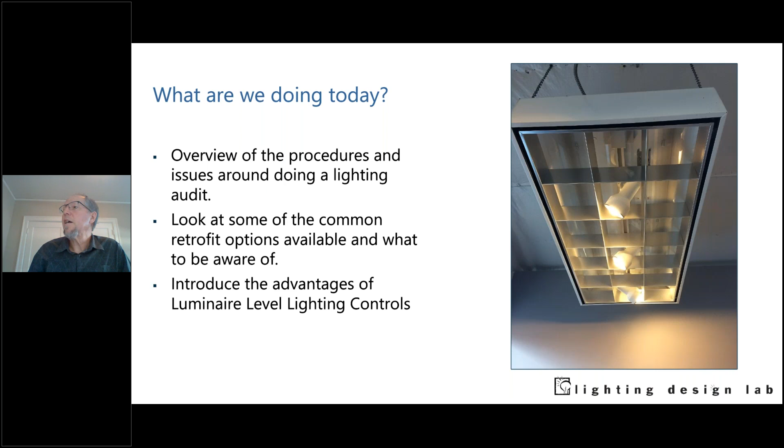In this case, this was a troffer type fixture that was sort of suspended, fluorescent, and the customer decided to convert it into a track fixture that's probably incandescent. So they went from maybe two 30-watt lamps to possibly three 75-watt lamps. They went from a general lighting fixture to something that's more focused, although in reality they were using focused lighting as general lighting. It's kind of crazy. Anyway, I love the picture. It's just nuts.

All right, so here's a little quiz to find out a little bit more about what our audience is and what you're interested in. Katie? Yep, so I have launched the poll. Eric, can you see the poll or just the screen that you have? I can't see it. Well, it's collecting responses. I'll close it in just a second, and then we should be able to see the result. Still voting. I'm gonna give it 10 more seconds. We're just trying to gauge what kind of knowledge you have, or what your hope is for this class. Okay, I'm gonna close it here and share it. Can you see the sharing, Eric? No. Oh man. Okay, so most of the people have done lots of audits and retrofits, but there's 38% that are new to the field and want to know about every aspect. Now, 8% thought this was a cooking class, so I'm really interested to see the survey at the end. All right. I'm going to hide this, and it'll go back to your screen. There you go. Thanks.

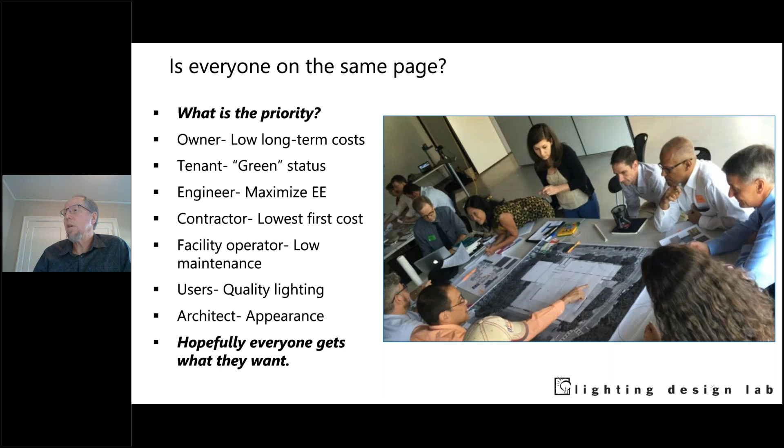All right, so you're called in. You always want to do a preliminary survey, and I found a lot of times that the thing we hear about is the hardest thing. The client calls and they're like, yeah, we've got this type of fixture or this type of space, how do we do a retrofit for this building? And you can spend a lot of time and effort on one or two trouble spots and not realize that the whole building is actually fairly easy, and you just have this one hard area.

This often leads to a discussion where I'll say, well, do you really need to retrofit the entire building? And sometimes they're like, yeah, we've been given direction that everything's got to be changed to LED. I worked on a project where that was going to be pretty simple for 95% of it, but they had some exterior lighting bollards where there was just going to be no decent retrofit. So they either had to put in new fixtures, which is kind of pricey, or not. And they were fairly new, probably put in within the last 10 years and functioning, but they were just metal halide. So that's a discussion you have to have: are we doing these, or can we just take a pass on those? And this is where sometimes a detailed audit is warranted, just to be sure you know what's happening.

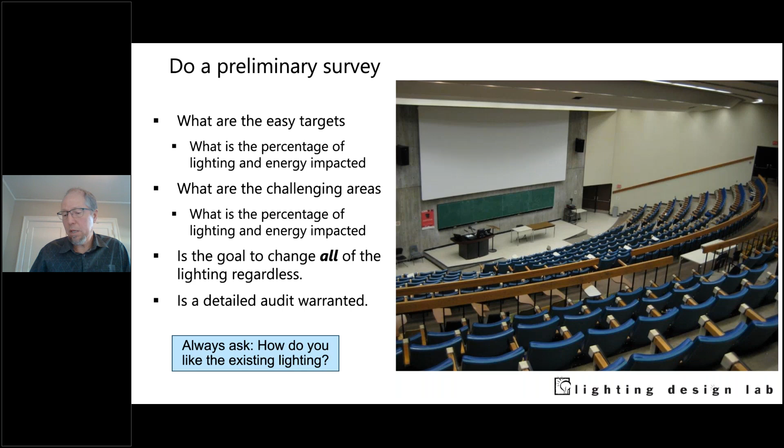You always want to come back to that question: how do you like the existing lighting? That term 'like' can have different shades of meaning. The lighting quality could be fine, it's just they're pulling their hair out trying to maintain it. Or it may be limping along, it's just bad lighting, nobody really likes it, it's not bright enough, or it's poor quality. So it's good to have that discussion with them.

So is this building a good candidate for a retrofit? That's a question. The client wants to do a retrofit, and you need to calibrate their expectations a bit on how much energy they'll save or how easy it's going to be.

Some clues you might look at for cost effectiveness is hours of operation. Is this a 24-hour facility, or is it 8 hours a day? Or sometimes it's a lot less than that.

We get calls from churches as a good example, where they have their sanctuary, and it's all incandescent, let's say, and it was put in 40, 50 years ago, and it's going to be a real challenge to retrofit it. It's using a lot of energy, but guess what? It's not really on very much - only maybe 2-3 times a week for a few hours at a time.

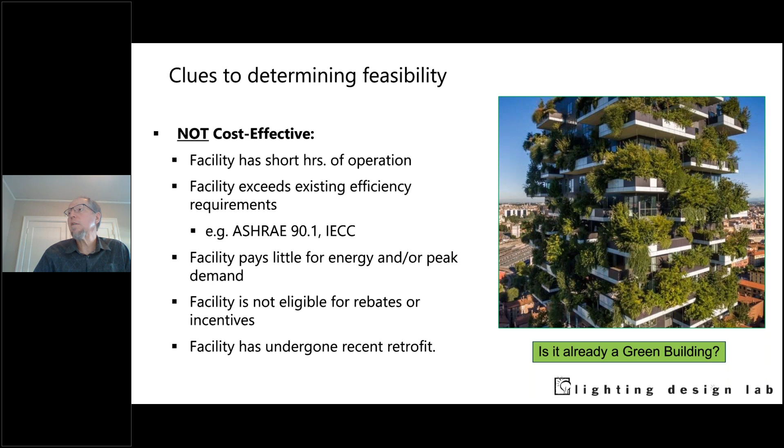Or a facility's undergone a recent retrofit. We've seen that where they want to switch to all LED, but the lighting is relatively new, and so there's not going to be as much savings as it would be for an older building with older lighting. I like this picture - maybe is it already a green building? Okay, so gotta find those things out.

So here's a little question, which is more likely to be cost effective? And we'll just talk through this one. I don't think we have a quiz for this one, but which is more likely to be cost effective, a community center gymnasium or a pro sports stadium?

The community center is lit all day long, and they don't have much daylight in there. So if they're using those lights all day and most of into the evening, whereas that stadium - where the Seahawks play, Lumen Field - they're not playing that much, and there's the odd concert or some other event there, but it's dark a lot of the time. So it's a different calculation.

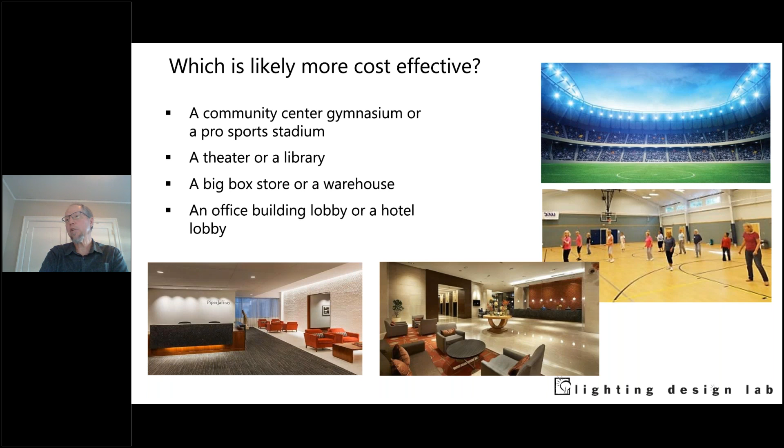Okay, so if warranted, a detailed audit may be in order. We'll touch on that a little bit later, but you want to do a plan survey. You want to try and find plans if you can. You want to find out if they're as-built. We've seen a big difference between the drawings that the architect generates and then what actually gets built, even in terms of room dimensions. And over the years, sometimes spaces get divided up differently, and the lighting maybe doesn't change, but the lighting use changes.

So that's something to be aware of. So anyway, you want to identify spaces that are going to be similar, so maybe you don't need to audit every space, but you need to look at a few of them. Look at the electrical circuiting, see how you can break things up for controls. You want to check current recommended light levels and lighting guides.

Down at the bottom there, we have IES recommendations, and those are certainly the foundation of where lighting levels would be. That said, we sometimes see building standards - so maybe the IES recommends 60-foot candles for a space, but you've got a client, maybe they're a retailer, and they say no, we need 80-foot candles in our aisles, or at our end aisles, however they have it. There may be some reason that they want higher light levels. Or you may have, like in Washington State, we have the WAC, the Washington Administrative Code, and maybe the IES recommends a certain light level in classrooms, and the WAC requires something different, usually maybe a little higher. But you need to check those things. So you want to be able to document the existing conditions.

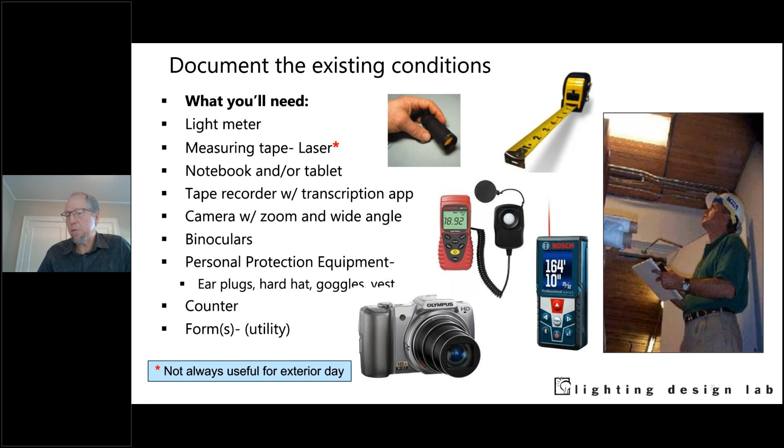So you're doing an audit, you want to document the lighting systems, look at light levels, the luminaire types, how many there are, what mounting. Sometimes it looks like there's all these different kinds of fixtures, but it turns out it's the same fixture, just sometimes surface mounted, sometimes hung on chain, sometimes recessed into the ceiling. You want to know about the type of lamps, the wattage, the color, make some note about the color. You don't necessarily have to be all that precise, but you want to see if there's color consistency from room to room or even fixture to fixture.

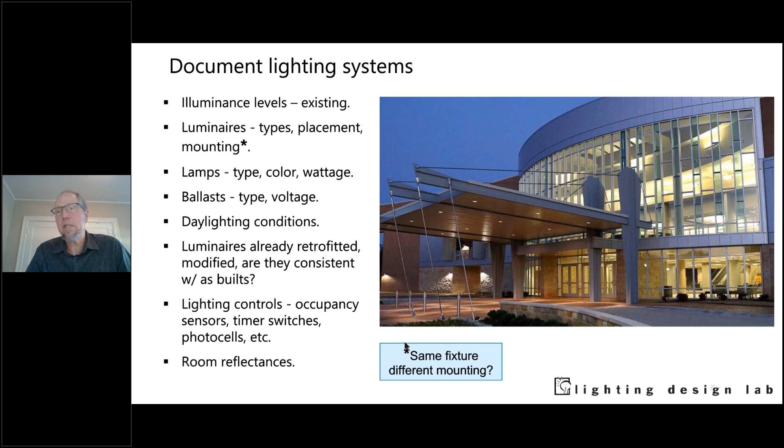The ballast types and the voltage, since most retrofits are going to be dealing with either metal halide high intensity discharge or fluorescent of some kind, and those will generally have ballasts. You want to look at the daylighting conditions and the daylighting possibilities. They may have poor daylighting conditions but good possibilities, or great daylighting, and you want to make a note of that too. Have the luminaires been retrofitted or modified? Because that'll have a big impact on the as-builts, so you would need to know that. What controls are in place and are they working, and room reflectances. We'll touch on that to some extent as we go.

So you also want to look at the conditions of the general building. What is the condition of the lighting? Is it all broken down, worn out lighting? In which case, you may do a retrofit, but you're not going to retrofit those fixtures. You're going to get rid of those fixtures because they're shot. And so the client may want to save them, and you need to have a discussion with them.

Are there any controls in use? And if so, like I said, are they working? Are the fixtures on when they should be off, maybe, in your opinion? Maybe they don't know.

The other conditions about the building: what's the ceiling type? Is there access to the plenum where the wiring and the fixtures might be? It may be that there's asbestos up there and there's really no actual access. It may be that it's just very dirty. And so if you're going to be up in that plenum, there's going to be a significant disruption in terms of cleaning and follow-through.

Again, daylighting opportunities, reflectance of interior surfaces, and also what's in that maintenance closet. Doesn't hurt to look and see if they have spare lamps, what those are, spare ballasts, things like that, that can save you some ladder work. If it looks like they have a very clean, well-organized maintenance closet, that might tell you a lot. If it's all haphazard, you probably have to go look at the fixtures closer.

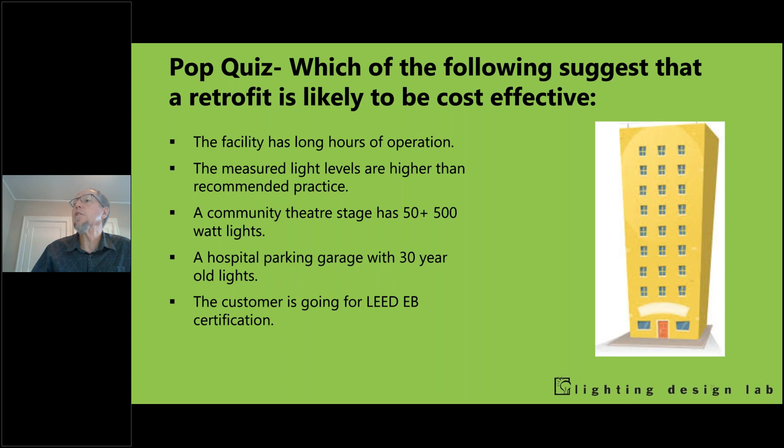All right. So document existing light levels. There's not necessarily one right answer for what the proper light levels are, but what is the proposed light level? What does the client want? And what is that based on, right? They might be saying, oh, well, we need 100 foot-candles just because someone told them that was a big number and they want it nice and bright. Or maybe they're going on some documentation. Where is it? Oh, somewhere.

I've got a copy of the IES handbook right here. But guess what? This is volume 1, first edition. So if I'm making my light level recommendations based on that authoritative document, those light levels are going to be way high. Over the years, light levels have been found to be able to go lower, and actually often improving visibility in some cases. And sometimes they've got building documentation, and if you look at it, it was written in the 70s, so you want to see, is it up to date?

Then what's recommended, and again, that could be what's proposed, what's recommended, similar kind of thing. Are the light levels consistent throughout the space? And are all the users happy with the light levels? Now, you can get into a real mess if you start polling everybody. Light levels are sort of like paint: what color should we paint this wall? Everyone's going to have an opinion.

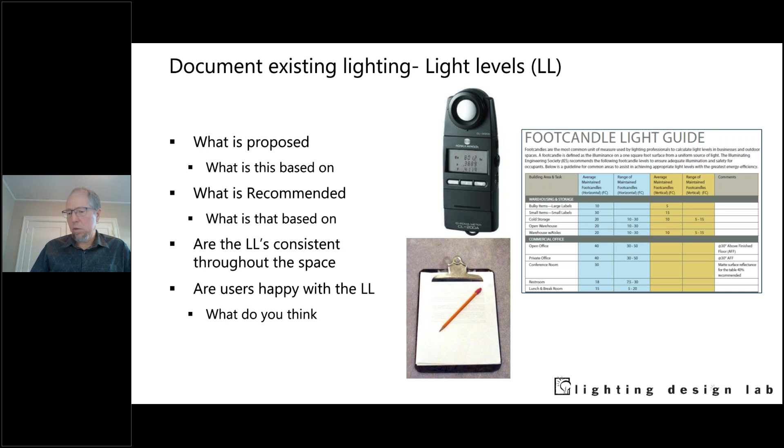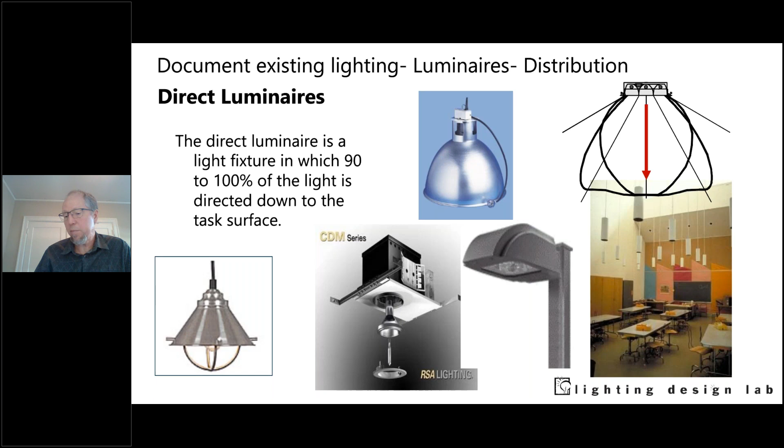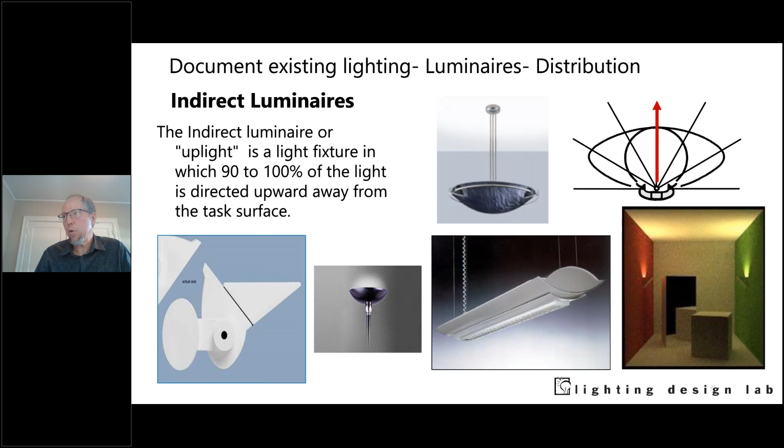You can see in the lower right-hand corner, those are indirect fixtures. So if they're going to paint that ceiling a different color, just like the fixture in the middle, that linear pendant, it's got a little bit of light that comes down, but most of the light is going up. So just because there's a little light coming down, you need to look at where most of that light's coming from.

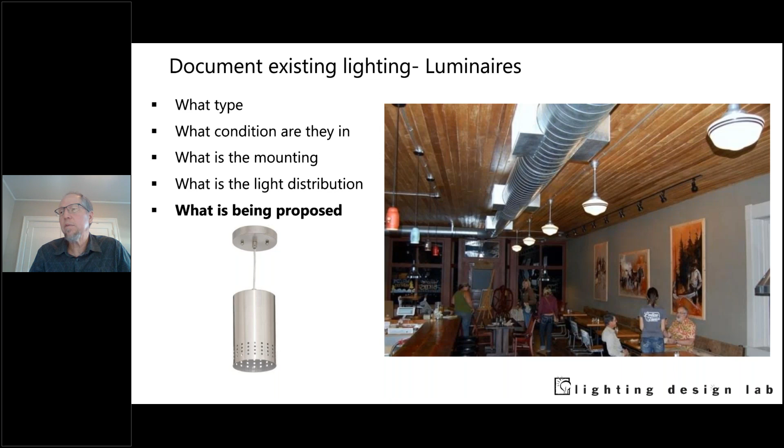They might say, great, because we hate that ceiling. Or they might say, oh, no, we can't have that. We love the wood ceiling. You just have to ask them, because that little metal cylinder is going to direct all the light down. And again, that's perfectly legitimate if that's what they're interested in. So you want to audit the fixtures.

What's the condition of the components? It's probably not practical to look at every fixture, but you might look at a few just to get a sense of the general condition. Open up one or two. I can see in this fixture, if you look at the sockets, the tombstones on there, they look like they're kind of fried. So I can see there's darkening on those.

So part of the retrofit, if they say, well, we want to keep these housings, is going to be changing out the sockets. They're probably going to need to do a pretty significant retrofit if they're planning to keep the fixtures. I see stuff inside that metal ballast cover there. We don't know what that is. It could be something dripping out of the ballast. It could be something dripping from maybe water intrusion into the fixture, which would be a bad sign. Is it rust? Did the last guy change the lamp and spill his coffee in there? I doubt it, but you never know.

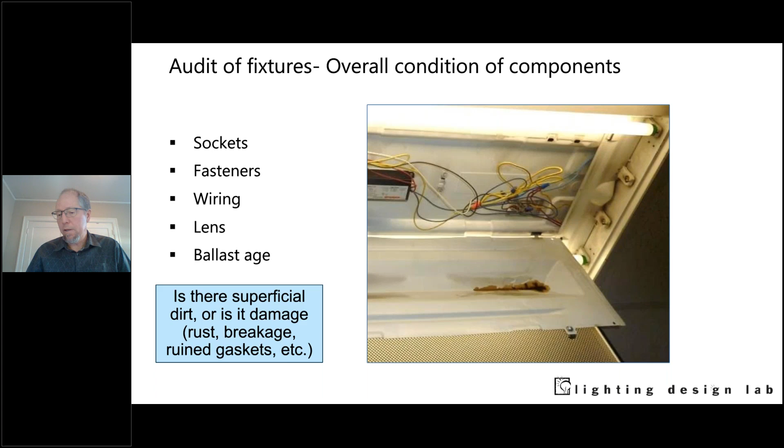So you want to look at the age. They might say, well, we want to save them, to save some money, but the fixtures are 40 years old. It's like, well, probably not. Those fixtures were paid for long ago. And you want to look at the types of ballasts, the existing ballasts.

So one thing that you need to note, we're seeing less and less of this, fortunately, is PCBs in the ballast. That's a toxin. If the ballast doesn't say it has no PCBs, then it has to be assumed that there are PCBs, and you have to treat all those ballasts like hazardous waste, which just means more cost, different kind of handling. So modern fluorescent ballasts, since recent time, I can't remember the exact year, unfortunately, would say on them contains no PCBs.

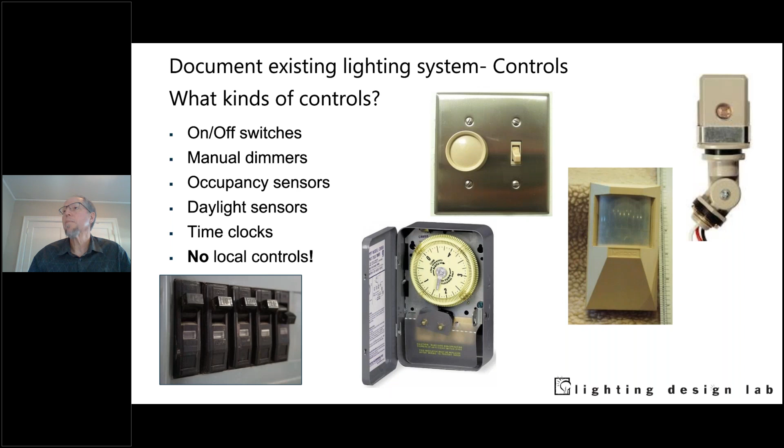With daylighting, it may be that you're not required to do daylighting controls, but sometimes it's so easy. Like here's a case where you could even just put this on a timer, where this little pedestrian causeway here, anytime after 9 o'clock, even 8 o'clock, there's going to be plenty of light. And yet here it is daytime, and the lights are on.

Maddeningly, this was the same facility. If you look at the picture on the right, the picture in the center takes you to the picture on the right, where you go into that dark enclosed space, and the lights aren't on in there.

Being a lighting person for so long, I'm always looking at lighting, and it's sort of a curse. You see it everywhere. Anyway, but it also makes it kind of fun.

All right, so we're still in documenting the existing conditions, walking around. We're looking at the room surfaces and thinking, what? This is interior design. I'm here to retrofit the lighting. But I'll show you that it can make a big difference. And the room surfaces can do a lot in terms of how they affect not only the measured light levels, but the perceived light levels.

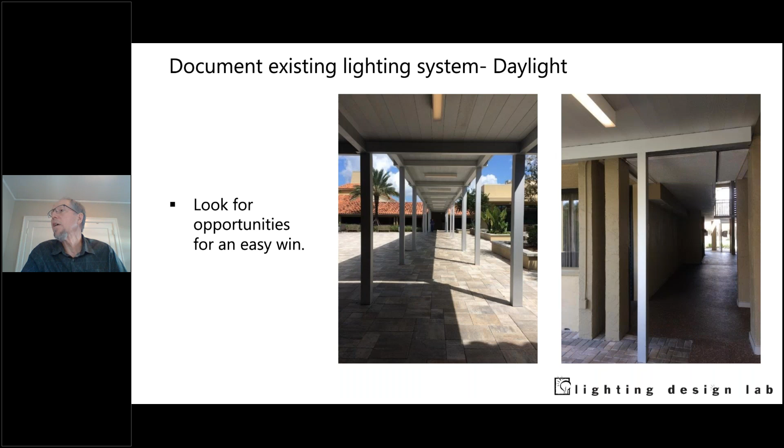And in fact, let's just go up here. Yeah, so, as an example, this little interior hallway that we see on the right-hand side, it has all that sort of tan color. And we can see that the ceiling in there that carries through is white. So you see how dark those walls are. And it would be a lot brighter if we did some mitigation, or even with paint. So let's take a look.

So here's a little model I did a number of years ago of a little office building. And if you look at it, you can tell that the upper section looks brighter than the lower section. So two things are going on. One, it looks brighter, but also actually is brighter. We can measure it. It's the same lighting, same furniture in both of those areas, just different surface reflectances.

So I'm going to try and go through this quickly here in the interest of time, but if you're running a calculation, and this is true even if you're not doing a calculation, but this proves it kind of. So if you do a lighting calculation of a space, you have to tell the computer program things about the space, like how big is it, how high is the ceiling, how big is the floor area, what kinds of fixtures are we putting in, how many, what's the spacing, where are the fixtures located, but you also have to put in room reflectances.

And the default room reflectances, as you can see in a little chart in the lower section in the middle there, where it says surface reflectances, the default is 70% for the ceiling, 50% for the walls, and 20% for the floor. And that would just be your sort of default reflectances. If you didn't know anything else, that's what the program usually defaults.

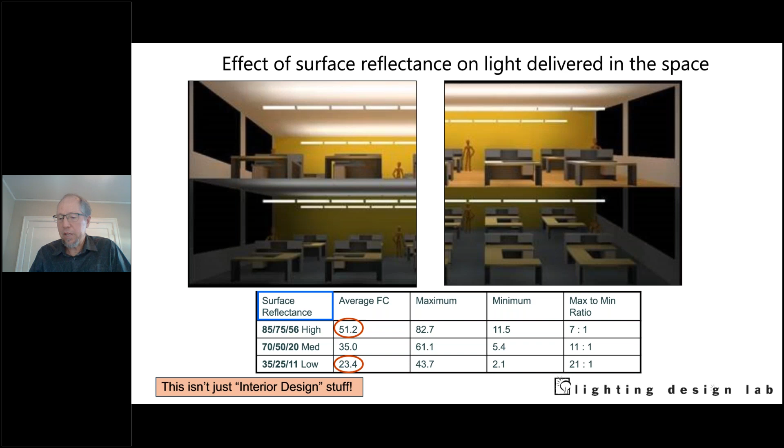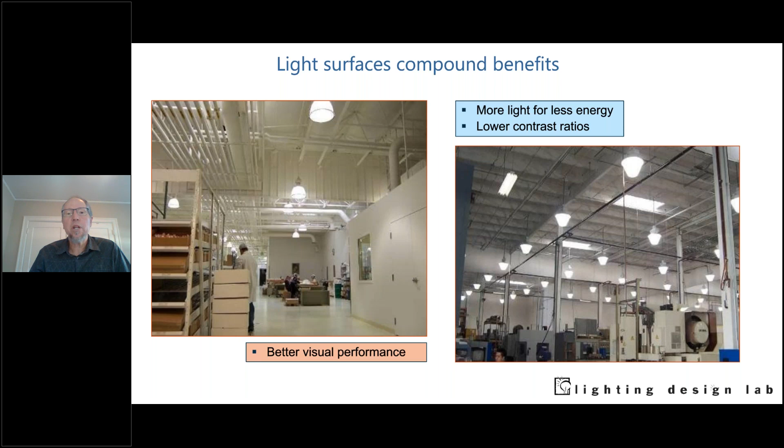So how do we find out what the reflectances are? We'll just breeze through this, but it can be done with a light meter on site. This isn't going to give you the exact number, but basically you hold your light meter to the wall in a space that's relatively representative. You wouldn't want to hold it in a spot of sunlight or in a dark corner, but someplace that's getting a representative light level, and take your reading. Then you turn your light meter around, go about a foot out from the wall, and take another reading. Then you do a simple calculation, which we have here, and that tells you the percentage of reflectance or absorption.

And so you know what the reflectance is of those spaces. Additionally, you can find out if you go in that maintenance closet and you see that they have some paint that's actually representative of what they've been using. You can often go to the manufacturer and it'll tell you the reflectance of those particular paints, or if they're planning to repaint everything anyway, you can find out.

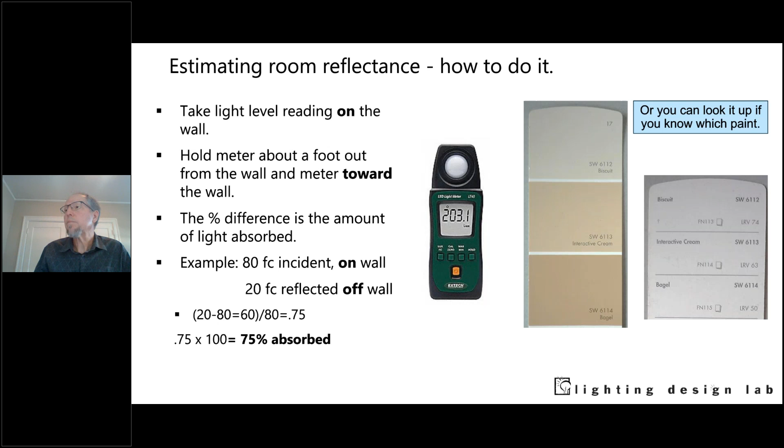Okay, so this isn't exactly a trick question, but it kind of is. When's the best time to do an audit of exterior lighting? During the night or during the day? Of course, intuitively, we think, well, you've got to go out at night. And in fact, you do.

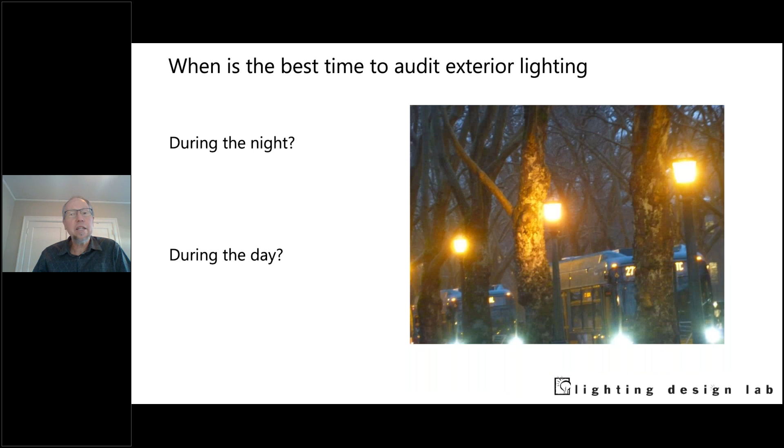But you also have to look during the day. Because if I only went out at night, I'd see all the lighting is lit. But if I go out during the day, I see something else. I see that the lights are on during the day. They're not supposed to be on. And I wouldn't know that unless I went out there.

Another thing, if you look at the lens on the fixture in the lower right, you go out at night, everything looks bright, you can't tell what's happening. But if you go out during the day, you can see that lens is very yellowed. We're probably losing 40% of the light in that lens, it's never making it out of the fixture. So they could go to a lower wattage if they're happy with the light levels they currently have at night. So you've gone out there and they say, yeah, this is pretty good, we just want new fixtures. Well, you can say, okay, they're losing a lot of light out of that fixture, so we don't need to use the current wattages as our guideline.

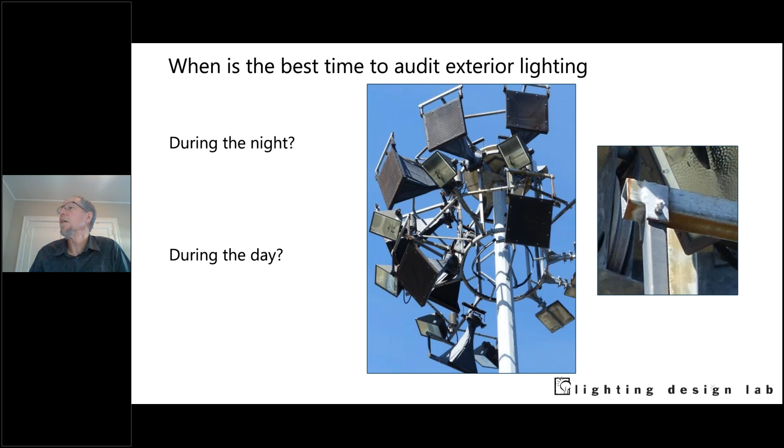Another thing you can tell during the day that's harder to tell at night is the condition of the fixtures. We kind of touched on that in the last slide, and this is where having a good camera or binoculars can help you. You can see if there's rust. They might say we don't want new lighting, but you have to look at that and say it's possible you need a whole new tower infrastructure, and it wouldn't make sense to put brand new fixtures on a structure they're going to need to replace. In this case, it's not actually particularly rusted, but it could be, you could tell things about the fasteners over the structure itself. So some more advanced lighting analysis tools would be...

A luminance meter: your typical light meter tells you foot candles, that tells you how much light is striking a surface, and that's what the industry uses for the most part. We talk about foot candles, but if you're getting feedback from the client or others that there's too much brightness, too much glare, or maybe you've got a sport facility and there's complaints from the neighbors, or you've got a billboard or a side of a building that seems too bright, you want to see how much light is coming off of that surface, and you would need a luminance meter for that.

Data loggers: people are like, oh yeah, we hardly ever go into that space. You put a data logger in there and you find out that they're in there all the time, or vice versa. They say, oh yeah, we use that all the time, we don't want controls in there, we're always in there, and it turns out they're almost never in there. A data logger will tell you those things.

Spectrometer: we're becoming more interested in not just the color of lights, but what's happening with the spectrum in that light. Flicker is back, especially with LEDs. It kind of went away with electronic fluorescent ballasts, but it's a concern with some types of LED sources. Thermal imager: you can see, especially with LEDs that are temperature sensitive, if they're getting failures, you can find out if there's issues with hotspots and thermal management in the fixtures.

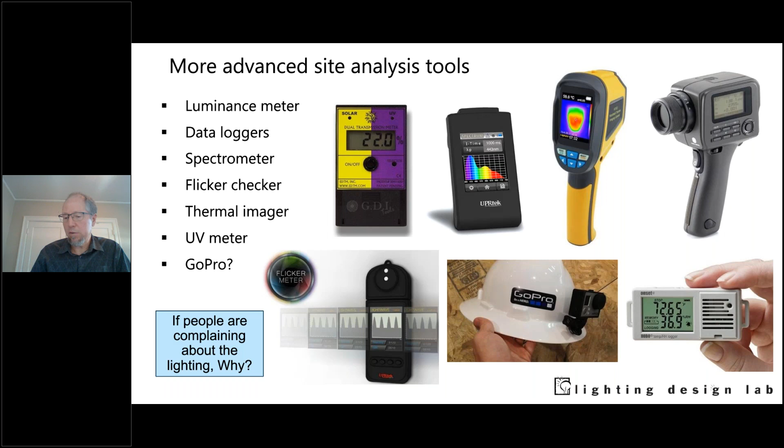Depending on the different tasks, we go to the current IES handbook. Well, it's not current anymore - I think they've gone to a different system, but it's still fairly recent. This is the 10th edition. There we see, if we look at the line, this is reading and writing on the green band on the left, for black ink.

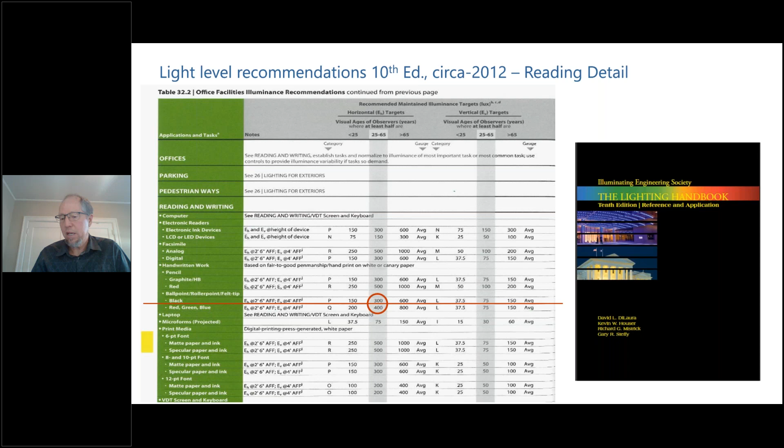So how much light do I need? How much light will I get? People always ask, well, how much light do I need? That's the first question. And then with a retrofit, how much will I get? That's an equally complicated answer.

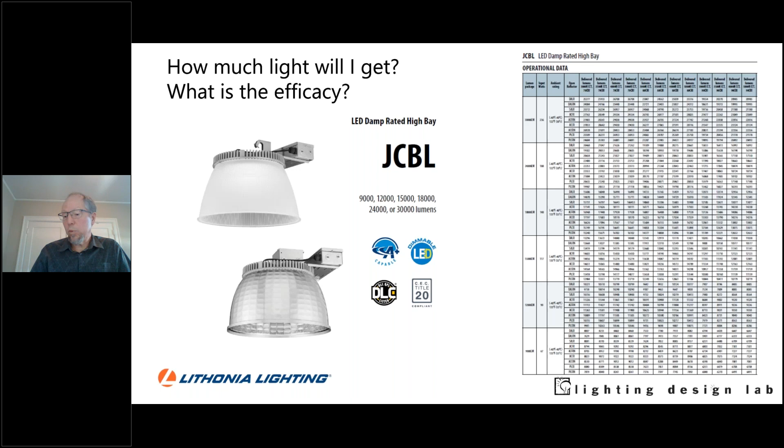Even for this fixture - here's a high bay fixture, a pretty standard kind of configuration. You might be putting these in warehouses or industrial facilities, but we'd also see these in food courts or concourses of different kinds. All kinds of spaces potentially might have this type of fixture, maybe with a slightly different look. But if I look to the right, there's all these different configurations that fixture can come in, so I don't know how much light I'll get until I know which one I'm using. Here's a case where there's so many options.

If I look in the upper section, this series is JCBL. Then as I'm moving from left to right, I see how many lumens - I have all these different choices of lumen packages. Let's say I picked a 30,000 lumen - we want the big one. And then I can pick different reflectors, different lenses, and different voltages. That won't necessarily affect light level that much, although it does a little bit.

In this case, it just comes with dimming. That's good news. So I'm going to have 0 to 10 volt dimming.

But then I can pick different colors. I can pick 3K, 3500, 4K, and then 5K, as they say. So different color temperatures, and then different color renderings: 70 CRI, 80 CRI, and 90 CRI. And you're like, well, let's pick the one that has the highest lumens. So if I look at the lower section, I've circled my little 30,000 lumen number. If I look at the two choices that are circled there, I get either 28,000 lumens or 19,000 lumens.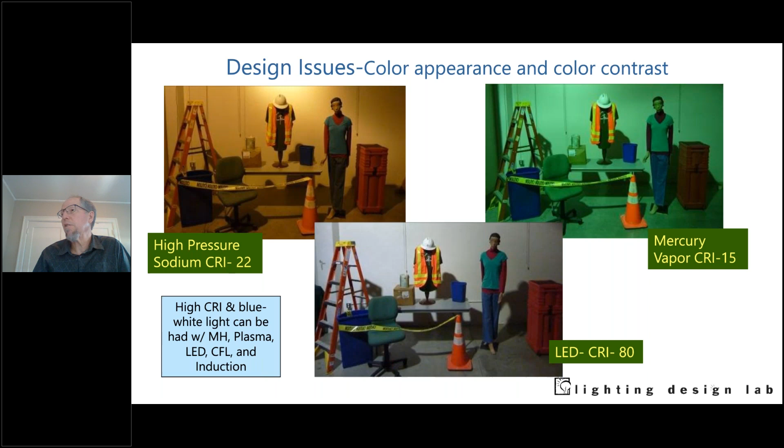And then we look at the one in the lower middle, and we can see we have a white light source that has high color rendering, and so we're getting true color representation. And that can be done with a range of quality light sources, but nowadays it's mostly all done with LEDs. And in this case, it's a CRI of 80, and that's quite acceptable for many applications.

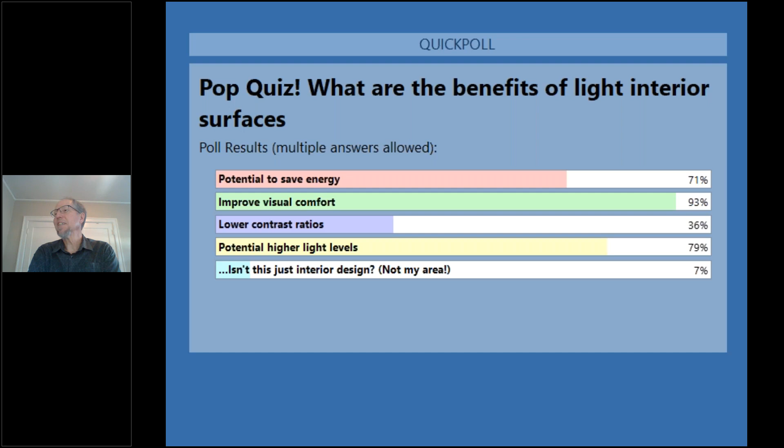Yes. Well, the thing of it is, though, if you're coming in to help do a lighting retrofit, you can't just silo yourself. If you see them picking dark colors, you have to ask. Now, maybe you're not going to dig your heels in and say, well, you can't do that, but you have to say, okay, you have very aggressive energy saving goals, but you're picking dark colors. It's going to make it harder to achieve those goals. And then maybe just leave it at that.

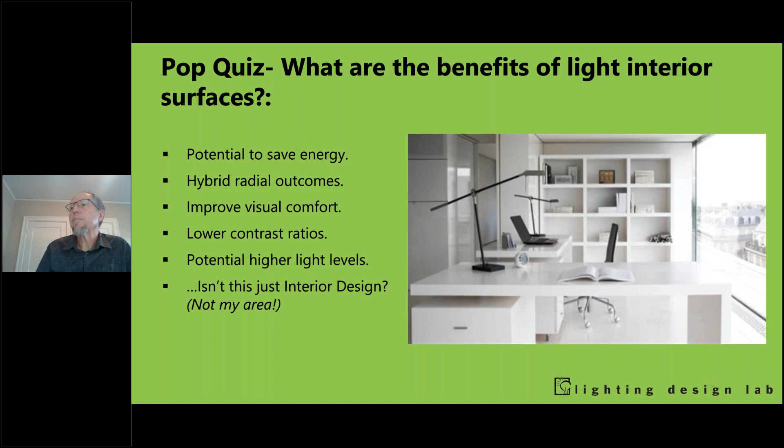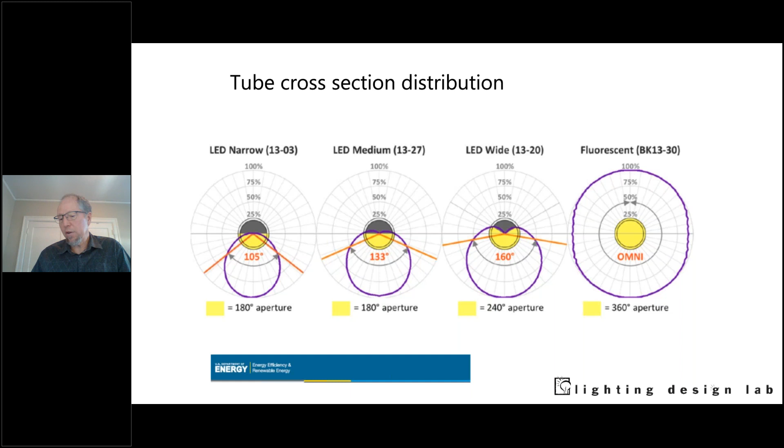You do have to look at the light distribution, though, and we talked about this earlier. So a fluorescent tube, if you look on the right-hand side, is omnidirectional. And most of these T-LEDs, even the ones that look to be omnidirectional when you're holding them, actually do have a certain degree of directionality. And that's not always a bad thing, depending on the type of fixture and your client's level of comfort with odd appearances.

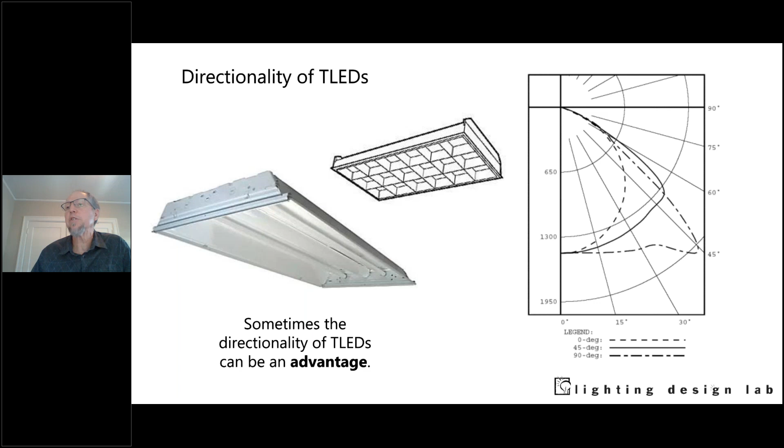There's also different types of wiring for TLEDs, and in the interest of time, I'm not going to go through too much of this, except to say that some claim to not require any wiring. They use the existing ballasts. But if you remember the slide we had earlier about the room where we opened up a couple of fixtures and found a whole range of ballasts, typically these work on only certain types of ballasts. And if I don't know what the ballasts are in a space, and I'm putting dozens, hundreds of these in a floor plate, chances are I'm going to have some problems.

Then there's ones where you rewire, you disconnect the ballast. That's this middle one, the UL type B. And that has its own fraught concerns. Now you have to have someone actually get up there and rewire the fixture, which may not be part of the scope if your idea was you were just going to change the light bulbs. Now we have to have rewiring, and maybe there's UL issues or safety issues.

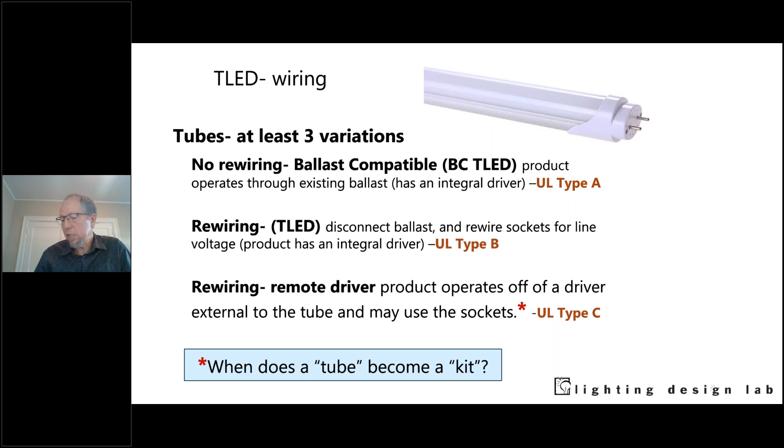And then there's ones where you have a remote driver. So with LEDs, instead of a ballast, it's a little device that looks a lot like the ballast that makes the LEDs work, and we call it a driver, a little power supply. With the first two choices, the driver is built into the tube. With the third choice, the lower one, the driver is separate from the tube, and it needs to be mounted somewhere inside the fixture housing. We call it UL type C. And sometimes when does a tube replacement become actually a kit? And this is relevant with certain utilities.

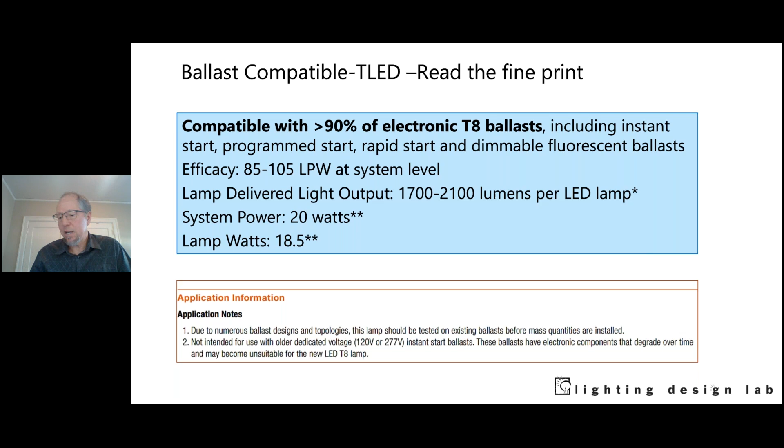So the ballast compatible ones, just to kind of run through this particular one, you can maybe read this later, but ballast compatible with 90% of electronic ballasts. Well, that means 10% won't be compatible. And then this manufacturer says in their fine print, due to numerous ballast designs and topologies, this lamp should be tested on existing ballasts before mass quantities are installed. Well, that's a good plan, but we don't always know what the ballasts are, as we've seen. And this is not intended for use with older dedicated voltage instant start ballasts. Well, generally, if you're doing a retrofit, you have older equipment. So yeah, not a good plan there.

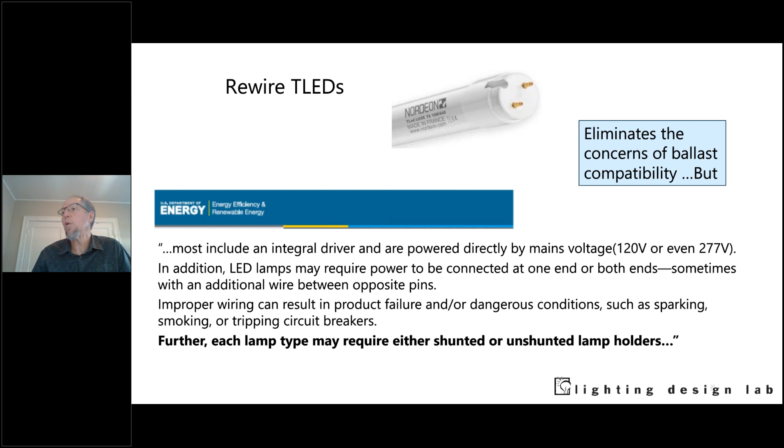The ones where you rewire eliminate the concerns of ballast compatibility, but, and this is actually from a US DOE report, most include an integral driver. In addition, the LED lamps may require power to be connected at one or both ends. Yeah, so the wiring is often different from product to product, so you're never sure. Further, each lamp type may require either shunted or unshunted lamp holders. So we talked about replacing the sockets, but you need to know which ones you're going to get. And particularly if you weren't planning to replace the sockets, this is relevant.

And it says right here, this is from one manufacturer who's selling this product, do not use this retrofit kit in luminaires employing shunted bipin lamp holders. Okay, they're telling us not to do that if it's shunted. The note is here, shunted lamp holders are found only in the luminaires with instant start ballasts. Well, guess what? 90% of the fluorescent fixtures out there are instant start. That's by far the most popular choice. So trouble on the horizon.

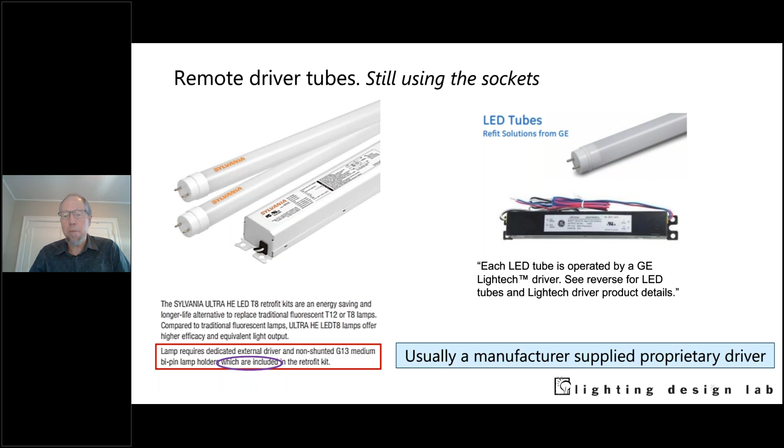Here's cases where they sell a sort of combination. It's not quite a kit, but they sell you the tubes and the appropriate driver, which are included, so that at least you know there's going to be compatibility there. And here's a case where we have remote driver tubes.

And the lamps, this is a kind of funny one. The lamps, if you look at the very left-hand side of the tube, it has the little pins, and they actually are held in place by the lamp holders, the tombstones on the fixture, the sockets, but there's no power going to those. It's just mechanically holding them in place, and the tube is being powered through that little low-voltage wire with the quick connect.

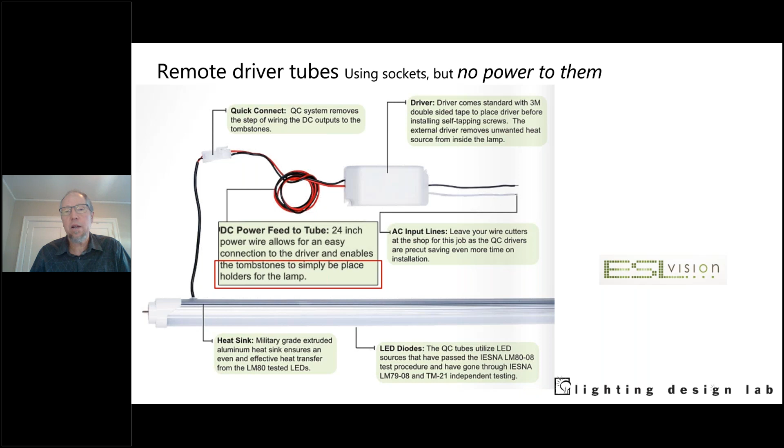The only problem there is UL, I think it's UL, says that if the product touches the sockets, it's considered a lamp. So yeah, it could cause problems. Plus, sometimes the lamp holders are failing and are not really holding things well.

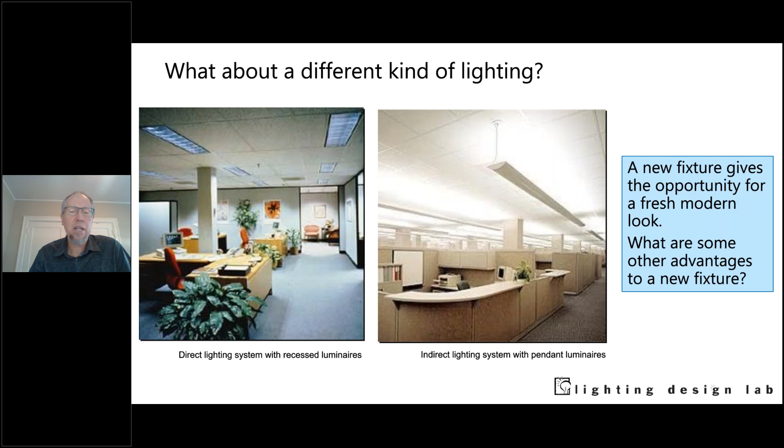So every type of fixture has a certain efficiency. There's the amount of light that the light source puts out, and then there's the amount of light that actually exits the fixture and goes into the space. And so in the old days, that would be the luminaire efficiency.

And so with our fluorescent fixture, we had an efficiency of 37%. That means over 60% of the light never makes it out of that fixture. So of our 7,200 lumens, we're only really getting about 2,600. Yeah, it's shocking.

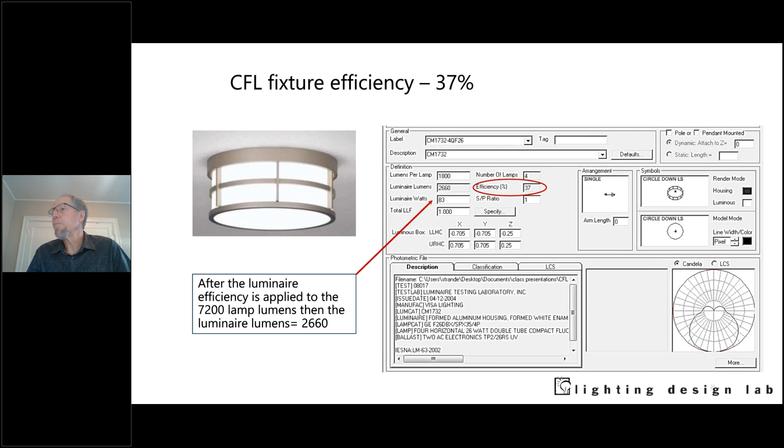Those are delivered lumens. So one thing that we can use, if the manufacturer has a thing called the lighting facts label, they have to declare the luminaire lumens. Other times in their literature, it will say delivered lumens. If they don't say that, we need to be cautious, and it could be that we're going to be losing 60% of those source lumens in the fixture.

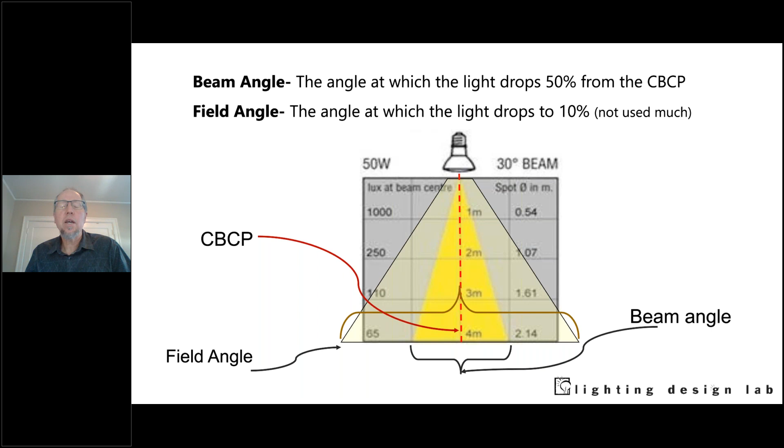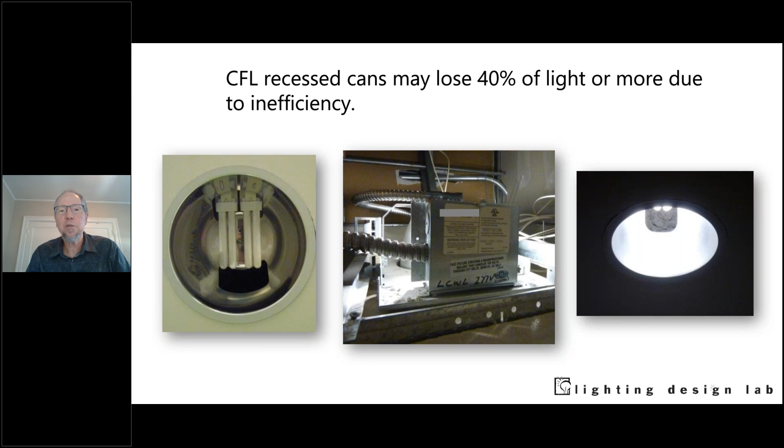Again, here we can see I'm always creeping around in the plenums. And so here's a compact fluorescent fixture. If I go up and look in that ceiling tile, look up in the plenum, look at all that light I can see up there. I can actually take a picture of the label with no flash, no extra light, just from the ambient light. Guess where that light's coming from? The recessed fixtures. All that light's not making it into the space.

So sometimes if we take out an omnidirectional source like the compact fluorescent on the left and replace it with an LED that's directional, I can cut my power consumption considerably, and my lumens might be lower, but I'm actually getting more light into the space. But we do need to be careful with some of these so-called compact fluorescent retrofits and check the compatibility. And I'll just run through a few here. I would say most of these are going to not pencil out.

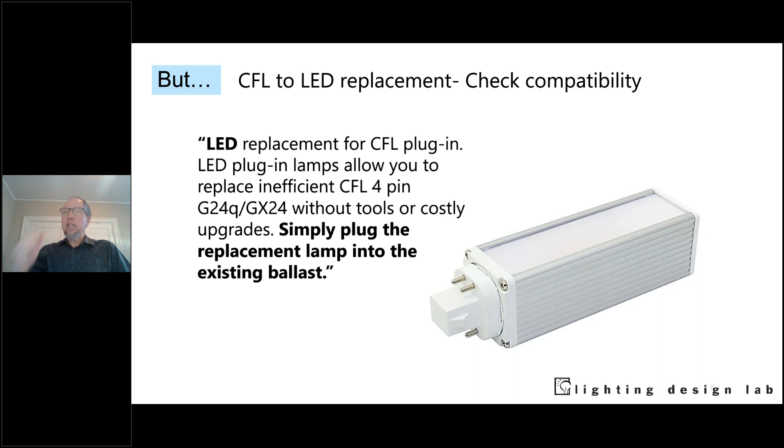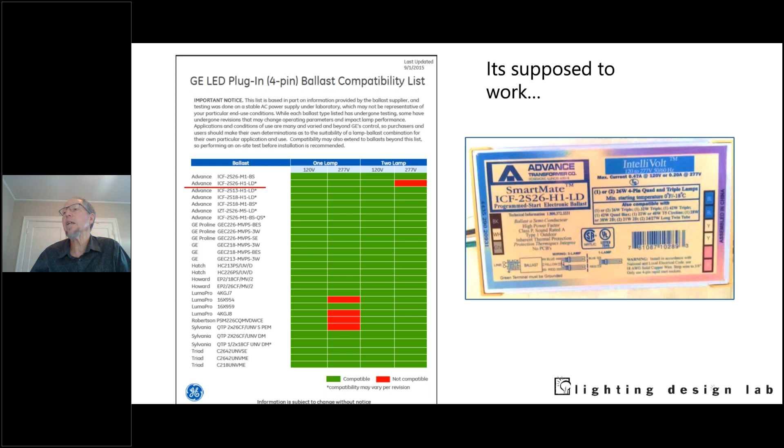But here's one where their literature said simply plug the replacement lamp into the existing ballast. Okay, well, I checked my existing ballast just to make sure it was compatible, I went into their guide and looked up the ballast, and sure enough, that was the one I had in my fixture, and I didn't have any red flags there, so I was like, great, this is going to work. But guess what? It didn't work. And then if I looked in their fine print, they had an important notice that over the years, some of these ballasts undergo changes, so performing an on-site test before installation is recommended. Okay, so thanks for letting me know that.

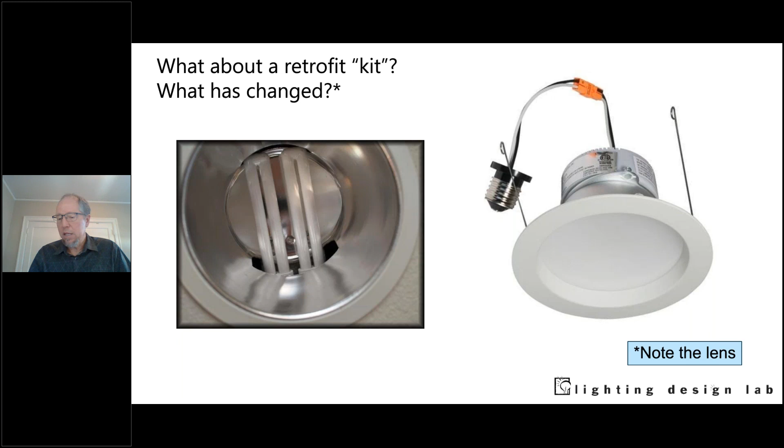So we're looking at retrofit kits. Again, in this case, a lot of these retrofit kits take a fixture that looks a little like this and turn it into one that looks like the one on the right. It goes from one that has no lens to one that does have a lens. That might be fine. But there are more commercial type retrofit kits where you're actually putting in something that is truly recessed. You don't have that lens right there. And that might be better, especially for commercial applications where you're maybe concerned about glare, or you really need a higher lumen level.

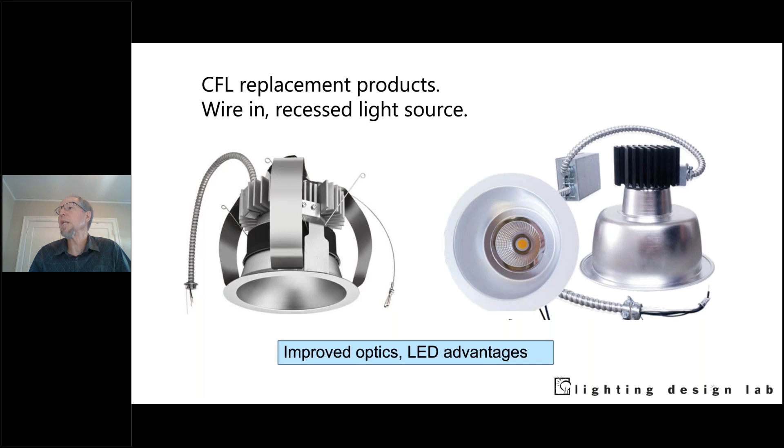Mogul-based HID lamps are used in only 2%. Mogul bases are those big bases that we see on the large high-intensity discharge lamps. They use only 2% of lamp sockets in the US, but they use 26% of the lighting energy in the United States and are second only to linear fluorescent lamps for lighting consumption. So there's not a lot of them out there, but they generally use a lot of power.

400 watts is a low wattage for exterior, and usually they're 1,000 watt. So it's a big target if you're looking to do retrofits. One of the things to keep in mind though is these are up at 40-foot masts, right? So that's a large area, long distance to cover, and the way to do that is with good optics. And the way you get good optics is with a point source. We'll just suffice to say that that's what's generally needed when you're trying to throw light 80 feet to the side and have it actually deliver.

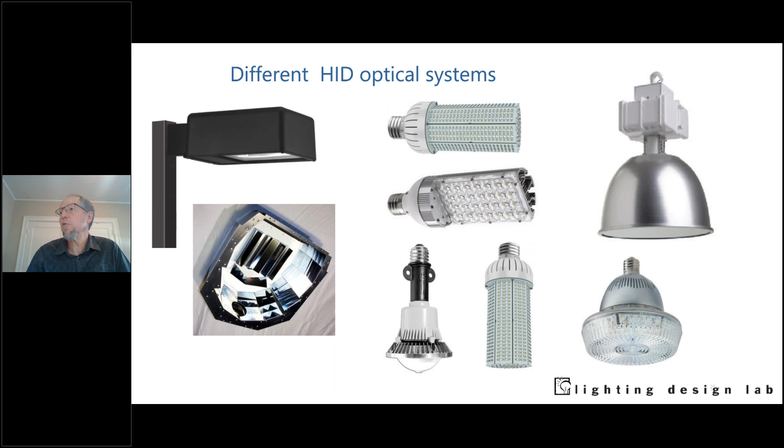Different HID optical systems. In some systems the light source is horizontally mounted. Other times it's vertically mounted, and that is going to have some bearing on how the light's going to be distributed and the form factor of the retrofit. Reflector types also. So we've got translucent reflectors. Sometimes they are optical prisms. Other times they're just sort of textured surfaces. It's good to know which one you have. And then we have solid aluminum reflectors that usually don't allow any light to pass through.

And depending on the form factor of your fixture, one type of retrofit may or may not be acceptable. So if what I had was an appearance on the left, and my retrofit gave me an appearance on the right, you can see how it's shadowy up there at the top. So that might not be acceptable. It might be perfectly fine for some applications, might not be for others. I know certain retailers are very picky about how the fixtures look, and others maybe less so.

Here's a case. Some of you might recognize this as what used to be called the Seattle bus tunnel, what I think is soon going to be our train tunnel. Well, it is the train tunnel, and I think they're retrofitting it to go off to Bellevue.

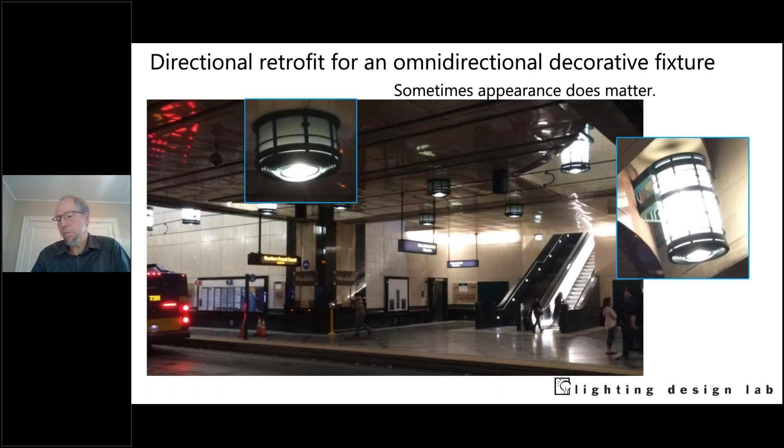Anyway, I digress. If we look at the decorative fixtures on the right, that big luminous thing, you can see the whole thing glows. It's got a lower portion that shoots light down, and then that upper portion radiates light out to the sides and looks decorative. And they retrofitted that with LEDs. They did the same to those shorter surface mounted ones, only they don't glow to the sides, they just send light out the bottom. So there's a case where that might not have been acceptable. I mean, they went with it, it looks like. Sometimes it's good to not be surprised.

What I had to start out with was try to model their existing condition. And they had mercury vapor lighting, which is pretty terrible. So almost anything you do will be an improvement. And they had 30 foot-candles average, and their lighting power density was 2 watts per square foot, pretty high for that kind of space.

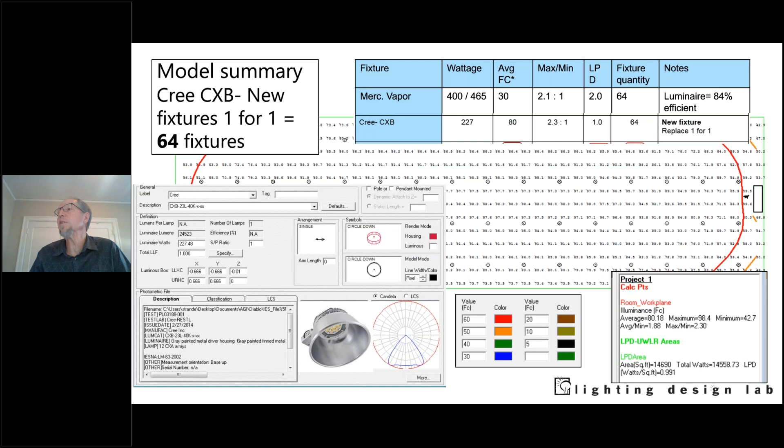So what could we do? Well, what if we lowered - they had a lot of fixtures, fairly high fixture density - what if we lowered the quantity of fixtures? So we put in about half the fixtures and carefully arranged them so they weren't getting dark. They still had good uniformity.

They were buying a fixture, so they went from a $300 retrofit screw-in to probably a $500 high bay actual fixture, but they only bought half of the fixtures. And they were at 0.5 watts per square foot, which was less than they were going to be before. They were 42-foot candles, so it was plenty bright. They could have possibly gone with a slightly lower output fixture. But anyway, it just goes to show if you push a little bit, you can actually get some better results.

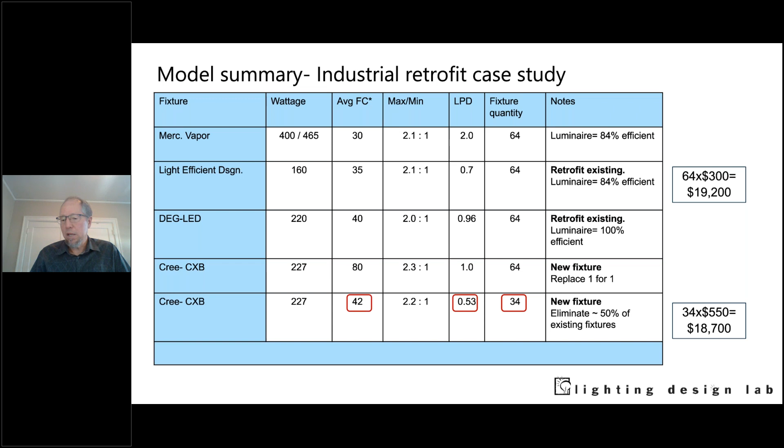So before doing an LED lamp only retrofit, always check to see which of the following: one, that the fixture is in good shape; two, that the lamp is compatible with the electronics, ballasts, and existing controls; that the optics are appropriate; that the utility is agreeable - right, so not all utilities are, and I didn't mention this earlier, but you need to reach out to the utility early on so you can make sure your method is going to work if a rebate is what you're interested in.

And two, that the customer has enough money - of course, you probably want to check that first. Anyway, but those are good things to check.

So here's a little bonus, and I think we can get this done in 10 minutes. Wanted to touch on luminaire level lighting controls, LLLC, and network lighting controls, and some of the benefits you get from that.

Why use controls at all? Save energy and save on maintenance costs, right? We don't want people to leave the building and the lights stay burning all night. I think we intuitively know that, although we have seen this over the years in some spaces.

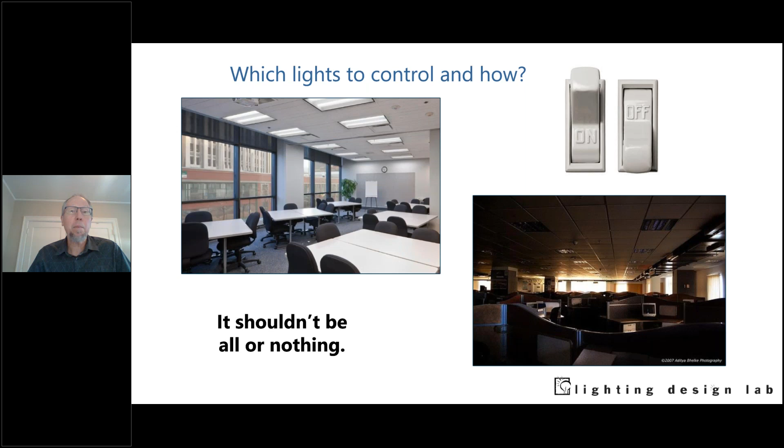So we have occupancy sensors - that's another way to do it, we'll do it when people aren't there. But I don't want to devalue this - here we have this whole space lit with just one person in there. Here's the other extreme, where we have a big old space, one person's in there, and there's one little pool of light. That may not be the best outcome either, for a variety of reasons.

So we get into modern lighting controls, and we've become accustomed to the lights and tasks changing - the lights changing based on wanting to change the intensity, wanting to change it based on occupancy, based on what's happening with the daylight, personal preference, or different types of tasks. So these would be reasons we might want to change the lighting.

So what kind of controls do these things? Well, we have, as I mentioned earlier, on-off switches, which could work in some kinds of spaces. Manual dimmers, so we want to change the intensity, and sometimes we're giving users control in real time of the lights in their general work area. Occupancy sensors, vacancy sensors - we'll touch on that - daylight sensors, and time clocks based on time of day or the calendar.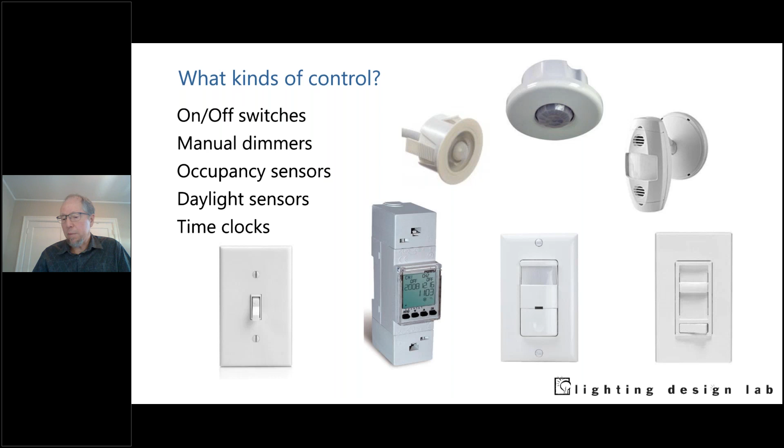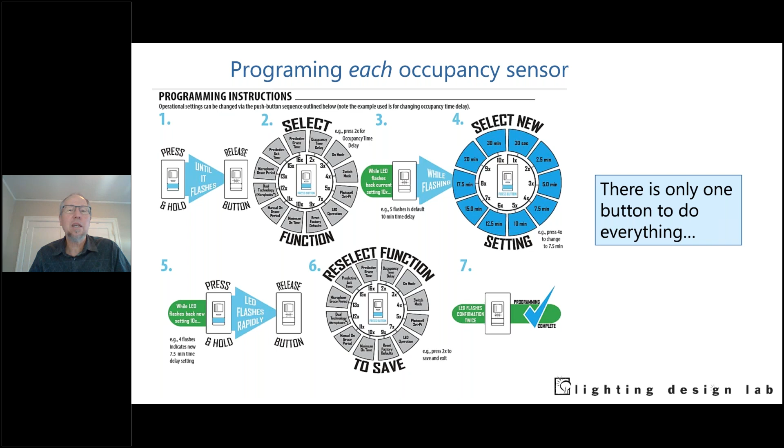How you set the sensor can have a big impact on the success or failure of a particular control device. We've seen some sensors that are like, wow, it's so easy, just one button. But you're pressing this little button - in this case, to get to a certain setting, I'm gonna have to press that button 9 times and count 9 little blinks back. And if I want a separate setting, I press it 7 times, then 4 times and count 4 codes that come back, and it's crazy. You're trying to do this while the technicians are in there, the carpet guys are in there, or the punch list is going on, the painters are maybe just finishing up. So it's a busy commercial space.

Here's another case of self-programming, one button setup. I'll be honest, I've seen this setup done a couple of different times. I think if you do it a lot, it makes sense, or if everything goes according to plan, it's sort of just one setting, one push, and it all works. But that hasn't been my experience.

So we're seeing graphical user interfaces that are a little more intuitive. They tend to cost more, so sometimes you have to purchase something that mounts to the wall, or a separate little GUI. But a lot of times these can be downloaded onto a phone that you might already have, and that can be a way to save on some costs.

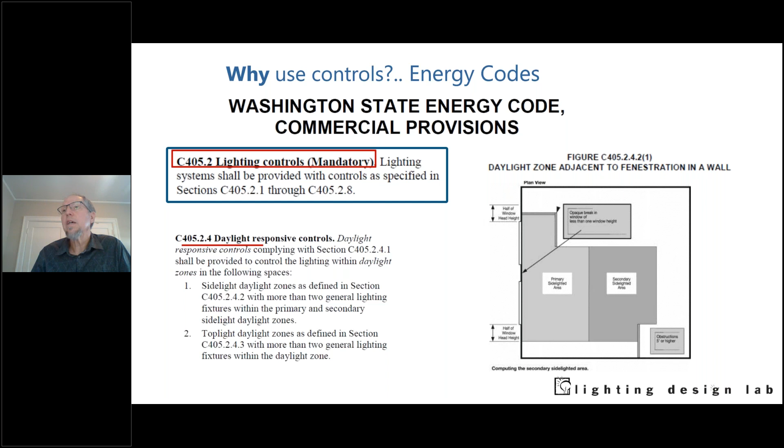So why use controls? Well, one reason is because we have to - energy codes mandate certain types of controls, and daylighting controls are one that are often required. Here's a floor plate, and I think we can look at this space and see we're used to daylighting controls, but guess what, we're not. Here's our perimeter wall, and we have our daylight zone, but now we also have primary and secondary daylight zones. So it gets a little more complicated.

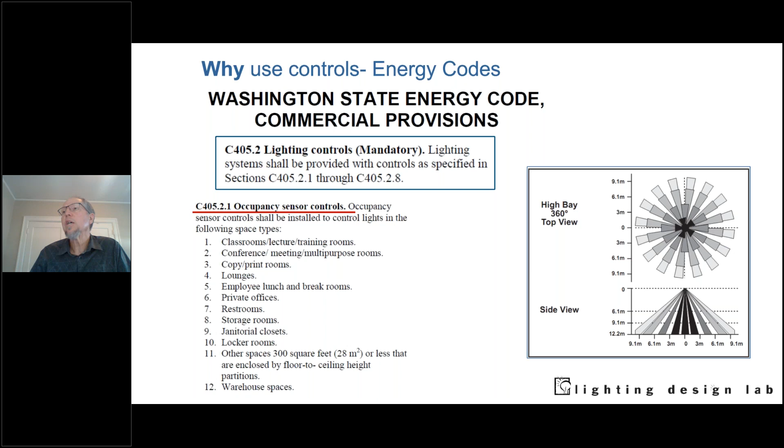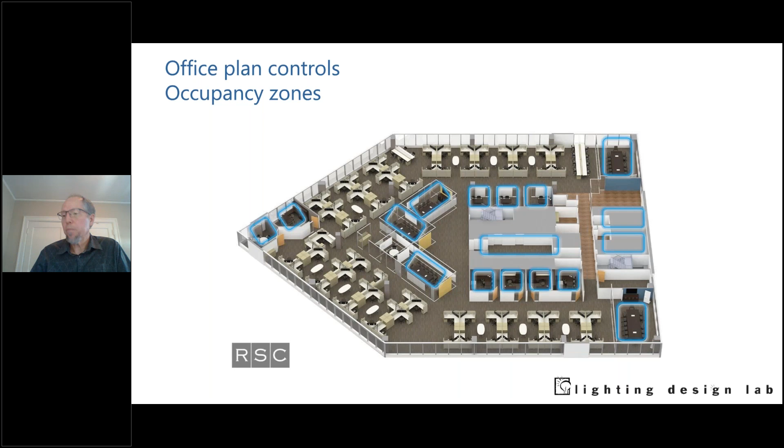Another reason we use controls is based on occupancy, and we're used to that too. Here's lunchroom, conference rooms, private offices, where we're used to putting controls in. But now we're also putting controls in open office areas - you can see these open offices are now controlled. Basically, almost every space needs some sort of occupancy control. And then we also have controls based on egress.

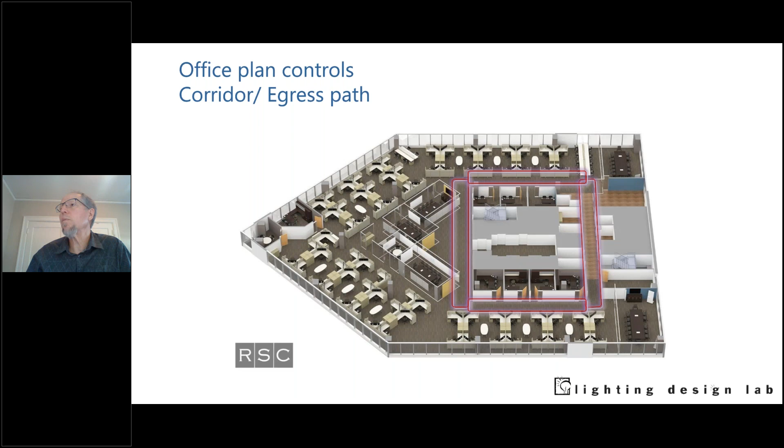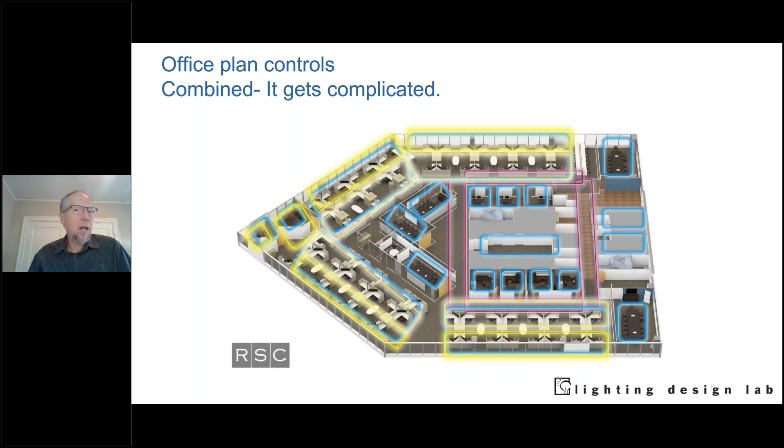So when we layer all that together, we have a fairly complex zoning pattern. That's not impossible, but it does get complicated.

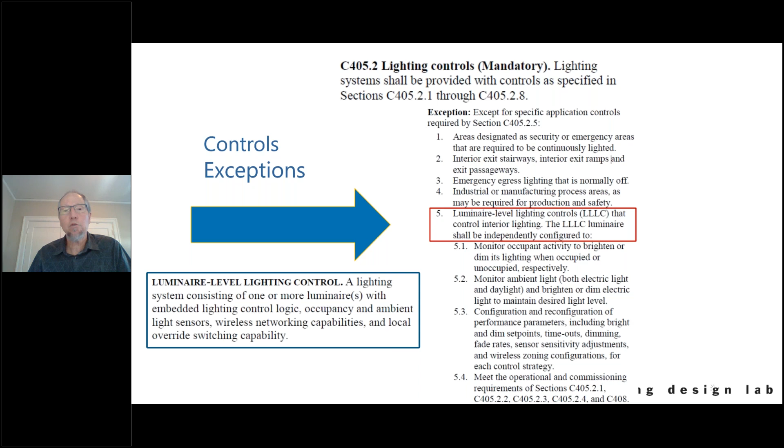So exceptions to controls - controls are mandatory unless we're using so-called LLLC types of products, and those are luminaire level lighting controls, where the occupancy and the daylighting is baked right into the fixture. Each fixture has its own controls. That could never happen? Well, we're used to putting individual controls on street lights or parking lot lights. So it's not impossible.

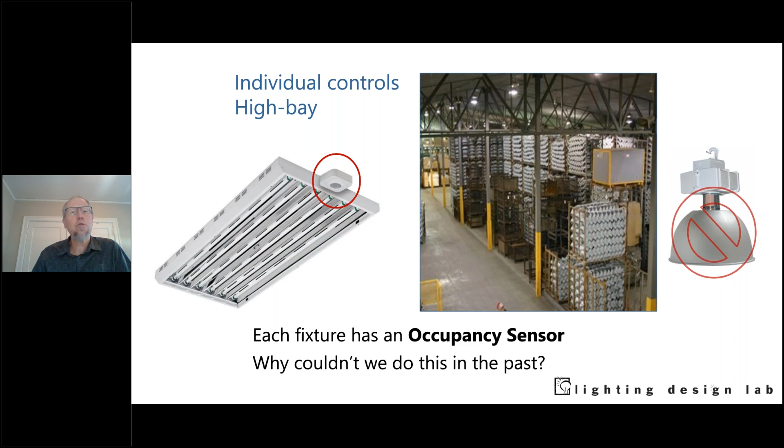What about interior spaces? We've actually started doing it there too. In the past, we couldn't really do it with high bay fixtures, but as we've gotten into fluorescent and even better with LED, we can turn the lights on and off without too much trouble. I'd say commercial, big warehouse, industrial spaces have high wattage fixtures in a relatively low density, so controls give you a lot of bang for your buck. You go into an office and you have a lot of fixtures and they're not high wattage.

So it's a higher fixture density per square foot. It's been a little harder to make, but there's been a convergence of technologies and timing here. We have miniaturization of control devices, controllable light sources like LEDs, and higher bandwidth so network controls are easier to do. We don't get bogged down, we can do floor after floor of these without overloading our servers.

Plus, we're having more stringent requirements for controls. The advantages are more savings due to higher energy efficiency, higher granularity with LLLC, each fixture has its own controls, no rewiring needed due to wireless functionality, and ability to rezone if the area changes.

Why do we put all this stuff on lighting? Well, lighting is a handy spot. It's in places where everybody is. It can also see the entire space. Usually lighting is a good location to have a network.

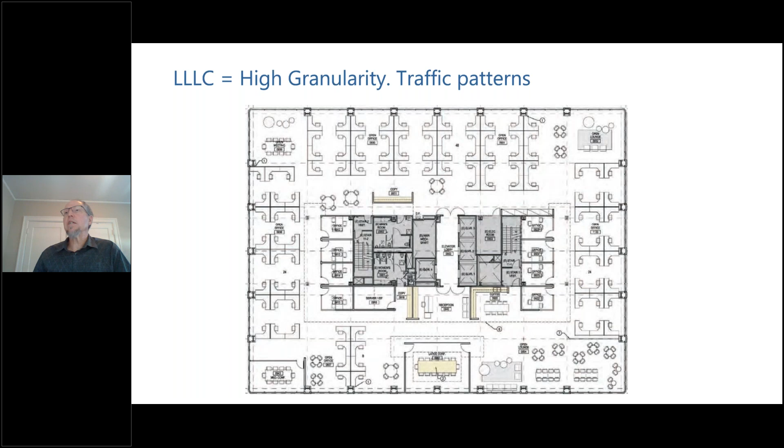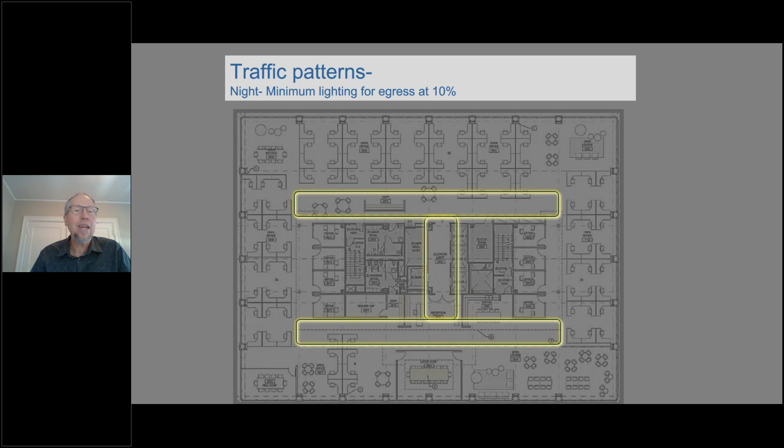Just want to show you this little scenario here. We're almost done, where we have LLLC in a space. So let's say here's our floor plate and it's nighttime. In yellow is just maybe some egress lighting that's cruising along at about 10% in the core of this space. And we get somebody who arrives early. It's still dark out, maybe the guy's there at 6 a.m. or something.

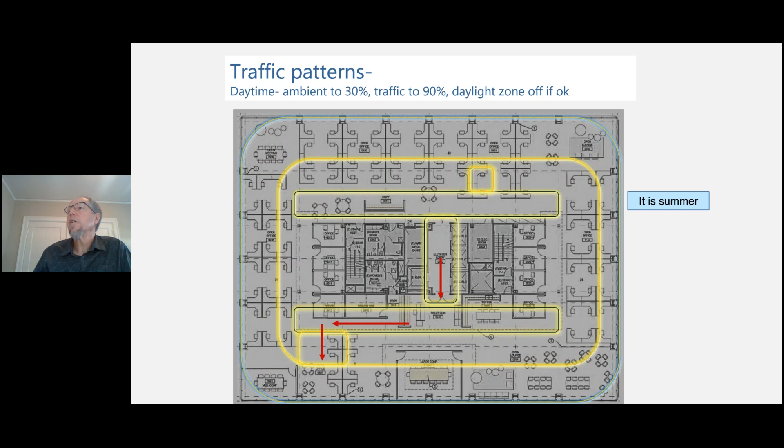Then later on, as the day progresses, we get people showing up, these people in the conference room, those areas are all controlled, but the general space is either off or at 30%, and we just have the 90% in some of those other areas. So we can see a high degree of granularity.